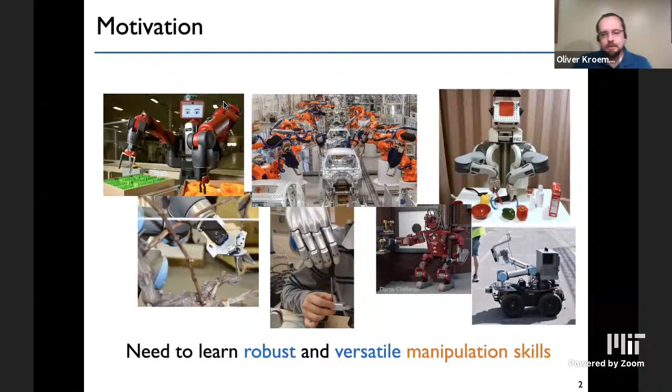So the grand vision really is operating in unstructured environments. And I think the key challenge there is, how do we take that complexity and make it into something that's tractable and manageable? Let's consider a robot that's trying to do some kind of cooking task, and how do we make that a little bit more tractable.

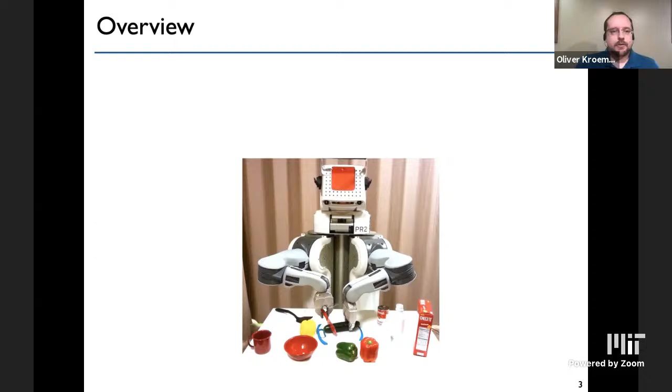One way of doing that is by focusing the scope. The robot's going to be surrounded by lots of different objects, lots of different things that are going to distract from the skill. But when we think about individual manipulation tasks, there's often only a few different objects that are involved, and we often only need to learn certain aspects of the problem. Being able to autonomously reduce that scope to just the areas where you need learning, and focusing that learning on the key challenges, allows you to create skills that are more versatile and more robust.

Another key tool in our toolbox is modularity. We could imagine this as a single monolithic scene, but as humans we tend to look at this and break it down into smaller pieces. So we have our two hands, obviously grasping different objects, the knife and the cucumber. We can have the food item there, and there might be other food items nearby, so maybe we have to select which food item we want to be cutting, given the current situation. We can take that complex scene and break it down into smaller pieces, and also look at how we can control the robot using a modular structure.

The last tool that we can use is interactions. The robot isn't just a passive observer, it's an active agent. It can perform tasks, but it can also interact with its environment to get additional sensory information.

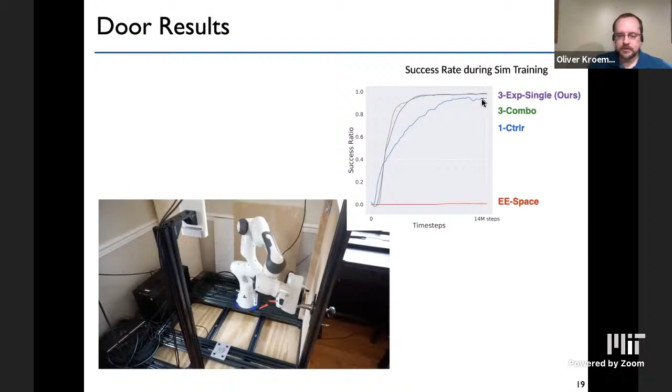So this is looking at how we can take skills, decompose them into modular components, and then learn to select them together to make those high-level skills again.

Of course, we don't just have modularity in the actual policies - we can also see them in the preconditions. The preconditions for a skill are effectively the situations in which that skill can be executed to achieve the intended effect. So for me, I always think preconditions are very important.

They're often undervalued, I find, but they're very important for working in the real world because they really define the scope of the skill. If the robot's working in the real world, there's obviously a lot of complexity, but as long as you have an accurate precondition, the robot can say, okay, I only need to learn the skill for these kinds of situations, I only need to apply it in these situations. And therefore there's this kind of contract - effectively you only need to learn a skill for those kinds of situations to have the intended effect.

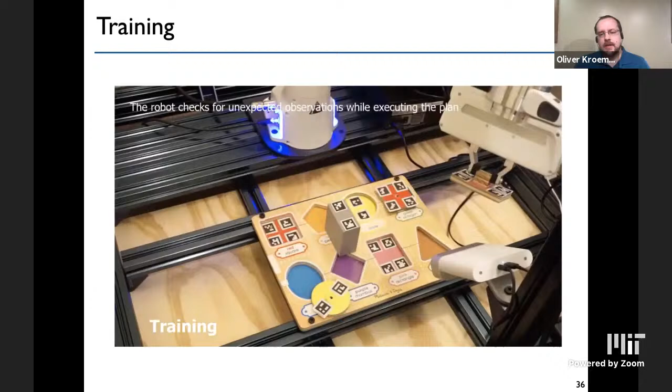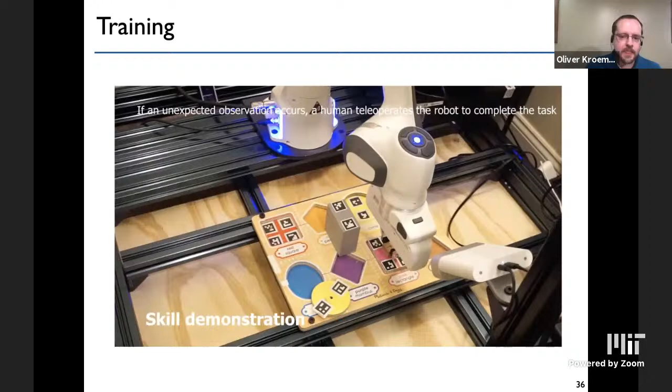So you can see what this looks like. This is the training phase. The robot creates this plan, picks up the object, and tries to insert it, then detects that there was an error—it didn't work as expected. Now a person is joysticking it with a game controller, demonstrating the insertion skill.

If we now test this, we can see it predicted that going directly for the insertion is not going to work. So it actually creates a plan to go to that corner area and then execute that skill from its precondition region.

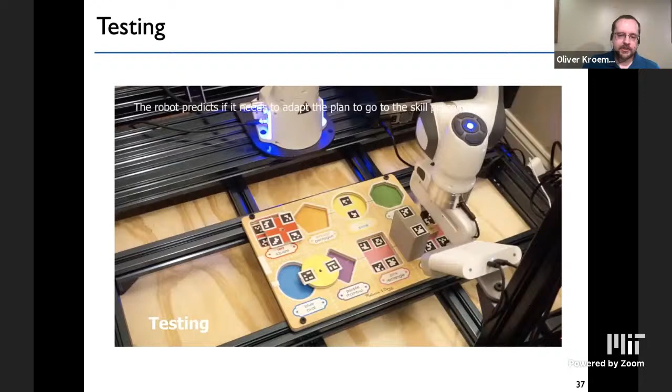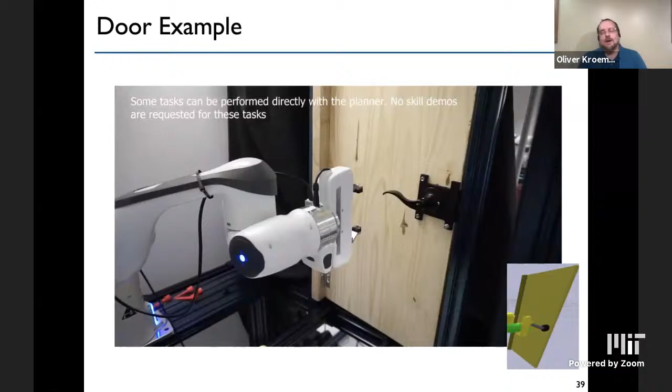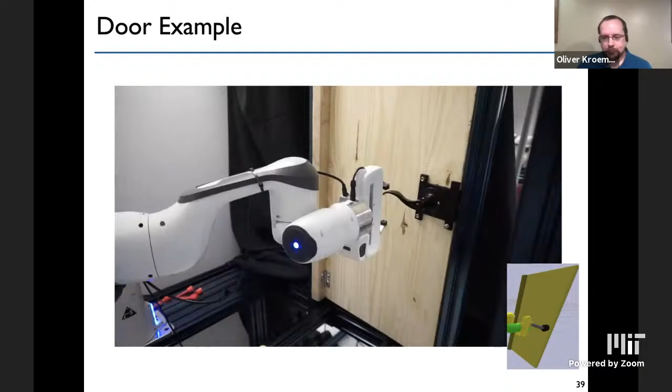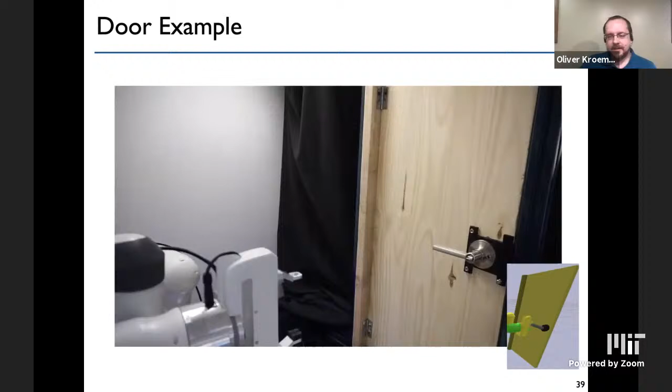One example I want to mention is this door example. This was a case I really love: we had our model, gave it to the robot, and the robot effectively just planned all the way through. We were expecting to need some kind of skill to open this door, but this was one of those nice situations where the robot basically said, it's okay, I got this, I don't need to learn anything, I can just use my planner. As someone who does a lot of work with learning, it's nice to sometimes have the robot tell me that it doesn't need it.

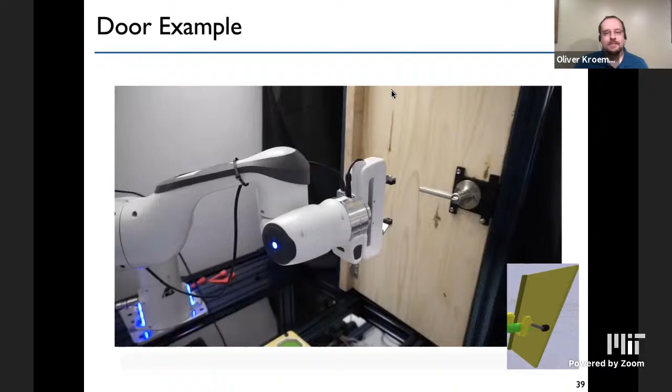All right, so that was looking at combining model-based planning together with this patching idea in order to learn more focused skills.

Another way that we can control the scope is by thinking about irrelevant objects and features. Often when a robot works in an unstructured environment, there are a lot of objects and distractors. Many things in that environment are not relevant for the task, and trying to learn to adapt to them results in very brittle kinds of behaviors.

Take the behavior where you're pouring, and maybe there's a book on the shelf that's in a different location today, so you pour differently. It doesn't really make sense for us as humans, but if a robot just learns over these different kinds of situations, that's something it can potentially learn.

So what we want instead is for the robot to identify what the relevant variables are and reduce its network to just focus on those. The way we approach this is by having a set of skill parameters given by theta, and these are executed by a low-level controller, which could be, for example, a DMP or some kind of waypoint trajectory.

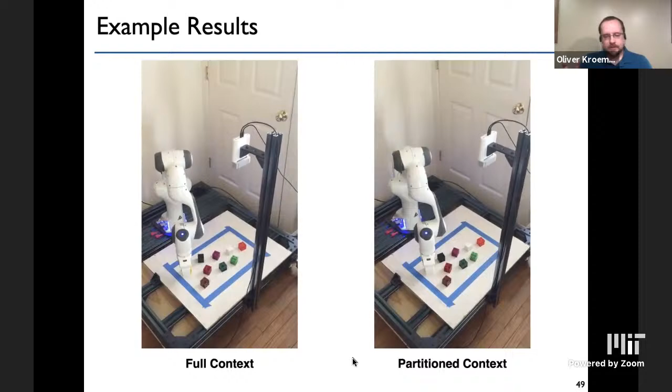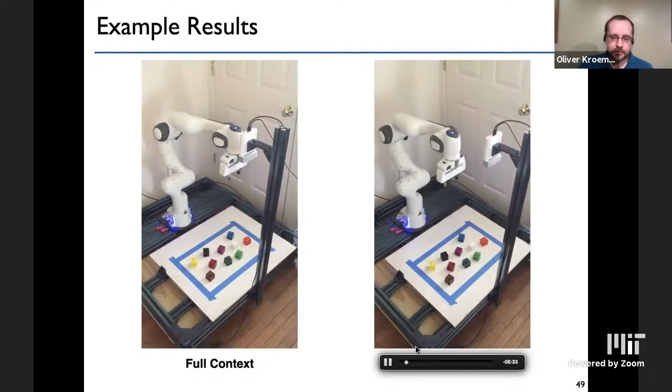As we saw in some of the simulation, whereas the partitioned one is a little bit more focused, and therefore has a much easier problem to learn because it's autonomously extracted that structure.

All right, so what are the key takeaways from this? First of all, it's important to focus learning on the problems where it's really needed. If we can reduce the size of the learning problem, that's often much more powerful—it requires less generalization. A lot of the generalization can be handled by that planner to get us into those specific situations where we can use learning. And by reducing the scope, we can also learn faster, for example from demonstrations.

I think it's also important to think about internal models, not just as a way of learning a skill, but really about structuring the problem—how we can use that model to reason about the problem so that it becomes simpler when we actually try to learn it in the real world.

So in this case, we looked at the relevance of features from that internal model, but there are other kinds of structures that you could potentially extract.

All right, so the last part of the talk that I want to discuss is actually looking at interactions, or how to get the most out of good vibrations, I'd like to call it.

So I think one of the main ideas, already from my PhD thesis, was this idea of really having to exploit manipulation modes. So when we perform manipulation tasks, we often have these sort of discrete situations where the dynamics are going to be shifting.

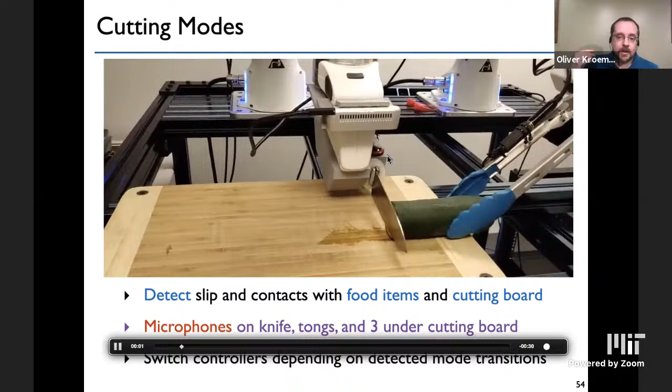Another thing you can do is it can actually collect additional information from these mode switches regarding material information. So in particular, when we're manipulating different objects, we want to be able to adapt to the kind of material properties they have. This is especially important for cooking domains.

So here, for example, as we move the knife down, we can detect that it makes contact, but we can also use that initial detection with the object to identify the kind of material it's made out of.

So in our experiments, we looked at 25 different food items, 23 of which you could actually cut. I think it was the spaghetti squash and the corn. I think those were the ones that couldn't be cut, but all the other ones could.

In some cases, obviously there are very strong visual differences, but there's also ones such as the cucumber, the old cucumber. If you're wondering, old cucumber means you've left it in the fridge for a week and forgot about it. That seems to be the student definition of old vegetables. And zucchini. So these three are visually very similar.

We also have, for example, lemon, orange, and frozen lemon. These are also visually very similar.

But what we're going to do is use this tactile vibration feedback in order to classify the different materials. So what we do is take the vibrations from that initial downward motion, about 0.1 seconds, we take the MFCC, the Mel frequency cepstrum coefficients of that signal, and input that into a multi-layer perceptron, a very simple network, actually 3 fully connected layers, 100 units each, and the output is the classification.

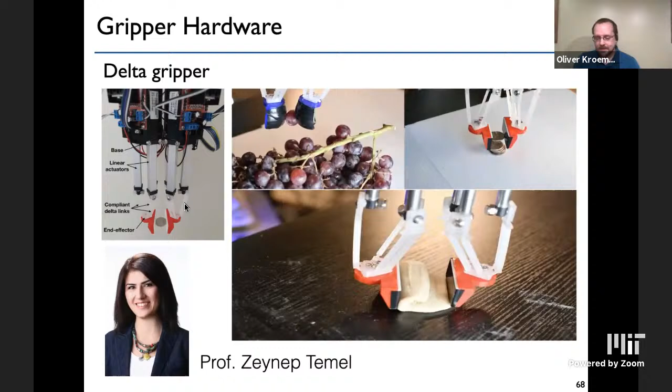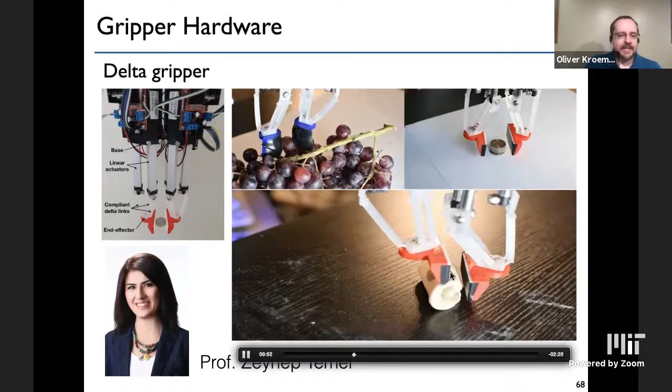We can see things such as removing a grape - I don't know why these are so slow - in-hand manipulation of a coin after picking it up, or even using dough to roll it. These were either pre-programmed or teleoperated examples, but I'm very excited about what we can do with this in terms of dexterous manipulation.